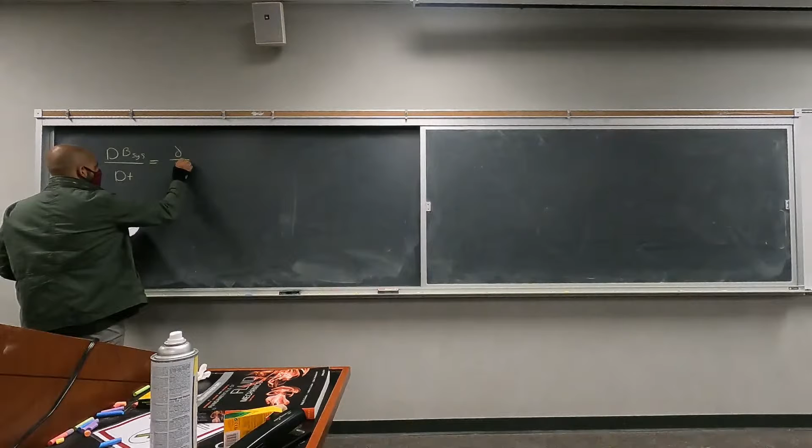Chapter 5, we started talking about it, if you recall, in the previous lecture. The idea was we are going to use the Reynolds transport theorem, which was one of the topics of Chapter 4, to derive the main equations for fluid flow. I'm just going to rewrite the Reynolds transport theorem just in case.

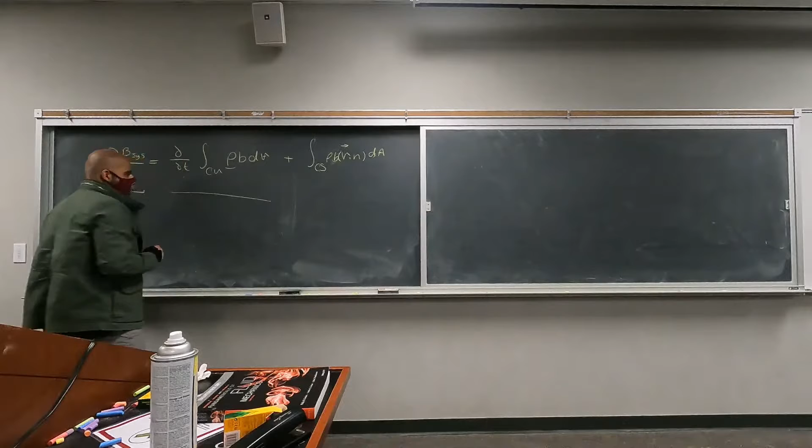Again, just to make sure we are all understanding what's going on here, the idea was changes of an extensive parameter B in a system over time is equal to changes of the intensive parameter, right? B equals M multiplied by a small b. The intensive parameter inside the control volume plus the fluxes over the surfaces.

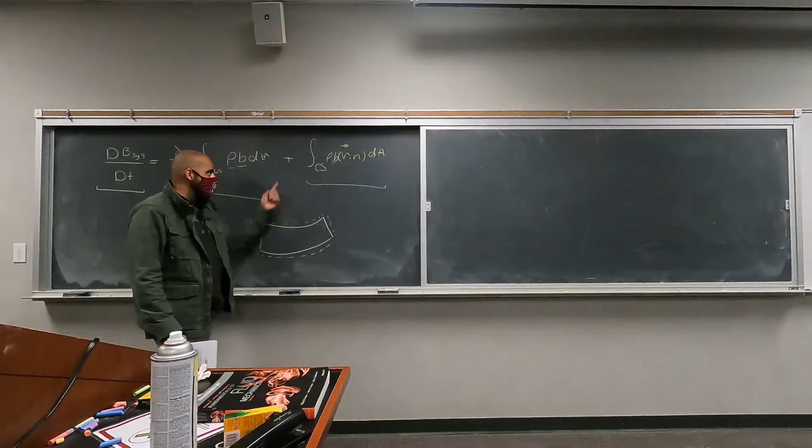To give you an example, let's say you have this type of control system passing through this control volume. Changes of variable b inside this control system are going to be equal to changes of intensive variable b inside this bigger control volume plus the fluxes on the boundaries, so whatever is going out or coming into the control volume. Okay, that was the idea of the Reynolds transport theorem. We're going to use this equation and find the main equations that govern the motion of the fluid, right?

The first thing we want to find is the conservation of mass. Since we are dealing with conservation of mass, your extensive property, capital B, is going to be equal to your mass, right? Which means your intensive property is going to be B divided by M, M divided by M. Your intensive property is going to be 1. We want to apply the Reynolds transport theorem to mass, using mass as the extensive property. So let's plug this in.

Changes of mass of a system with respect to time has to be equal to the changes over time of the integral over the control volume of rho multiplied by 1 multiplied by the elements of that volume, plus the integral over the control surface, these are the surfaces of the control volume, of rho multiplied by 1, which is your intensive property, multiplied by the... okay.

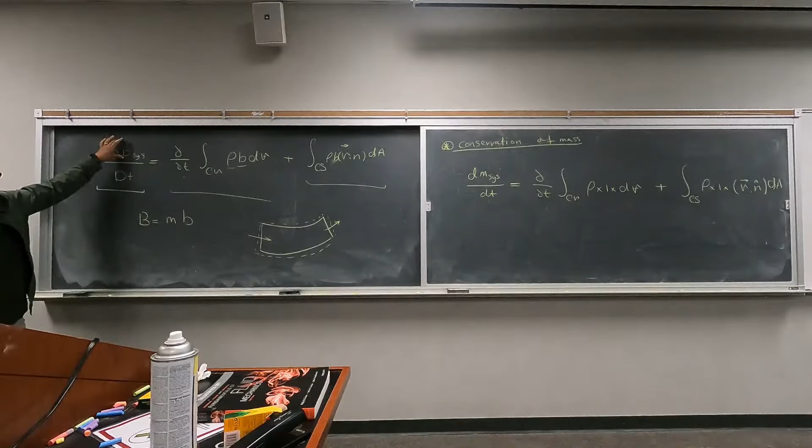Before moving on, I just want to make sure we are clear on all of the parameters that are used in this equation, right? Again, this B of system is a property, an extensive property of the system. t, of course, is time, and this is capital D, which stands for total derivative of that extensive property with respect to time. We have learned about total derivatives in chapter 4. I can see some examples in your homework as well, taking the total or substantial derivative.

This part, we are taking the derivative with respect to time over the control volume, right? So changes of that property inside that volume. And if this intensive property doesn't change inside your volume, so it remains constant all over this control volume, we can take this out, and you just want to make sure that we are understanding what this equation represents. Okay, let's take that out, just this part.

I'm assuming that this b doesn't change over the volume. So this essentially means that it is constant with respect to volume. We are going to treat it as a constant. You can take it out of the integral. We are going to treat it like a 2 or a 1 or whatever, right? Integral over the control volume of rho dV, right?

In most of our analysis, we assume density is also constant, right? Which essentially means that we are dealing with the integral of dV, right? And the integral of dV is your total volume, right? So if these things don't change with volume, this is what we are going to get: b rho V. What is rho V? It is m, right? m equals density multiplied by volume.

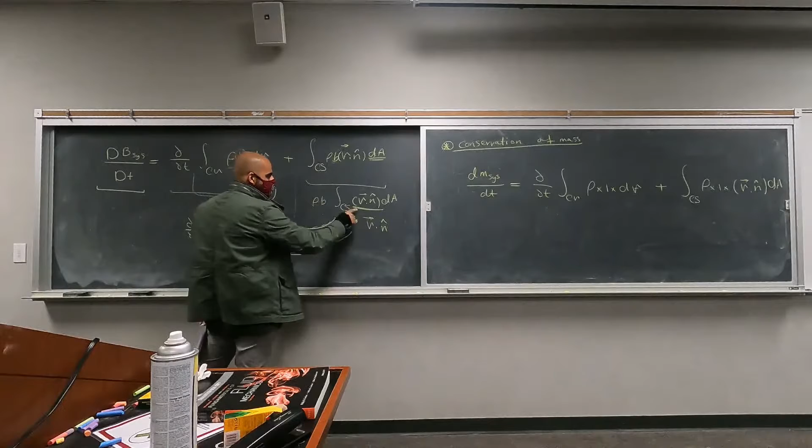When you multiply your V, your velocity vector, by a unit normal, what you're going to get is the velocity component that is normal to the surface. Okay? So this is the only part, the velocity component that is normal to whatever outgoing or ingoing surfaces, right? So the normal here changes direction. It has to be normal to that specific part of the surface. Does this make sense? So if your velocity is going out of the control volume in this direction, in this calculation, you only care about the normal component of it.

Again, if we assume that velocity is also constant and doesn't change, we can take it out. Okay. And then we are taking the integral of dA over the surface area. So we are dealing with rho b V A. Rho V A is m dot, right? Rho V A. This is something we have seen before, right? Okay. So we can replace it with m dot b.

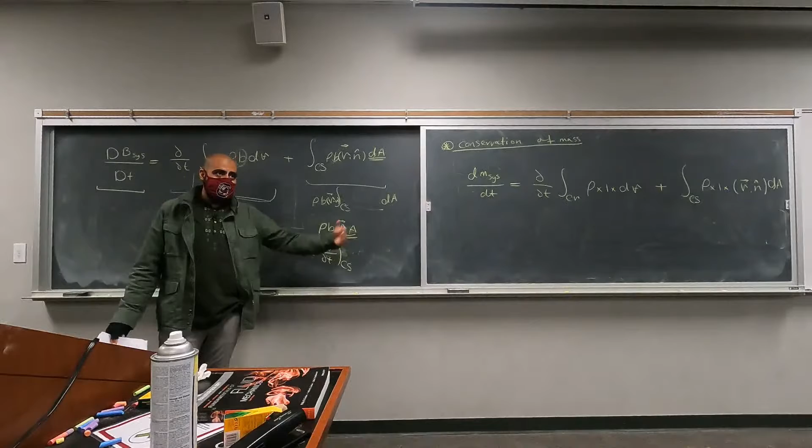Or how much of this extensive property goes out of the control surfaces. Okay. So changes of extensive property in a system are equal to changes of that extensive property inside the control volume, plus whatever of that extensive property is moving out of the control volume or coming into the control volume. Okay. To better visualize it, your book actually has this example, and we talked about this. Let's say this is your general system, right? Again, inside this control volume at time t equals 0.

Again, control volume at time t equals to t1. Your system has moved out of the control volume, right? So this will be whatever volume that has gone out. This will be this part of the system, right? And then the changes of this property inside the control volume is going to be this minus whatever has moved out of the control volume, right? Okay, does this make sense? Hopefully. Okay.

So just to make sure we can better understand what this Reynolds transport theorem stands for. We have used M as the extensive property, which means that for your intensive property, you're going to have 1, because intensive property was defined as the extensive divided by M. But what was the changes of mass of a system? We define a system as a volume or a selection in space that doesn't have any mass flow out or in, right? Which effectively means that mass of a system is constant.

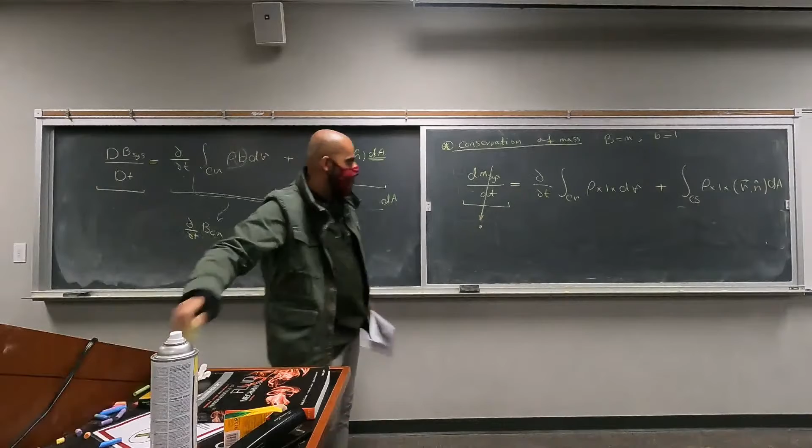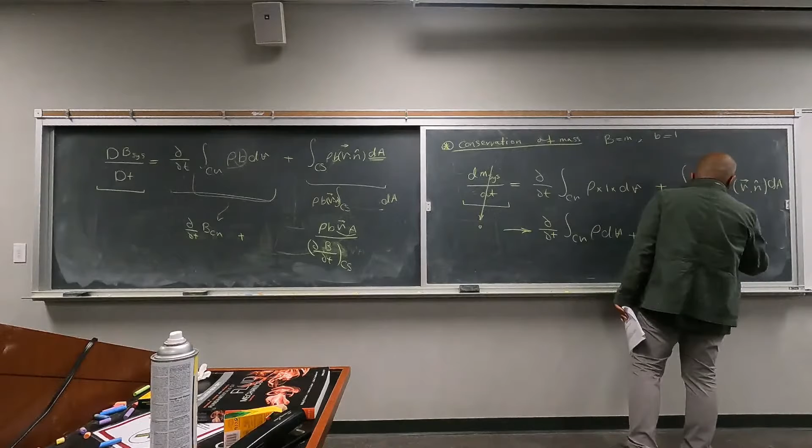So for a system, changes of mass over time is 0. That's based on the definition of the system, right? This is how we define the system. So this part is going to be 0 based on definition. Okay? Then our equation is going to become this: rho dV plus rho Vn dA is equal to 0.

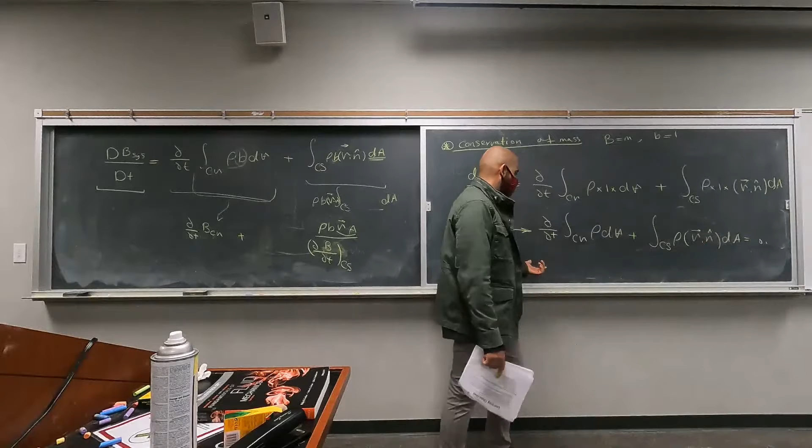What does this equation tell us? This tells us that the changes of mass inside a control volume is equal to the total mass in minus total mass out, right? If total mass in is equal to total mass out, then there is no change of mass inside the control volume. The mass is going to remain constant inside the control volume. If somehow you're creating mass inside the control volume, then m dot in is not going to be equal to m dot out. Okay? Any questions about the conservation of mass equation?

Again, we usually express the mass flow rate as your flow rate multiplied by your density, or flow rate is AV multiplied by rho. We usually say rho AV, but it is the same thing, right? That's for the case where your velocity is uniform in the outlet. So let's say you are dealing with a flow inside a pipe. Velocity is coming in with this distribution, which tells us the velocity does not change with respect to y. Velocity is always going to be equal to V infinity.

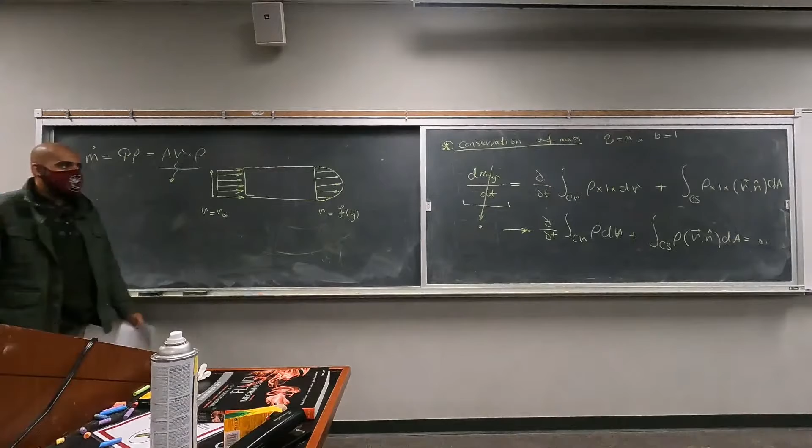In reality, your velocity is a function of y. So this is going to be the real distribution of the flow inside the pipe. It's going to go from 0 to a maximum value to 0, right? If the velocity is uniform, we can find the mass flow rate on a surface by multiplying density by the cross-sectional area of the pipe and the velocity. But in our equation here, we are not making any assumptions about the velocity. So the mass flow rate of a surface is going to be the integral over the control surface of rho Vn dA.

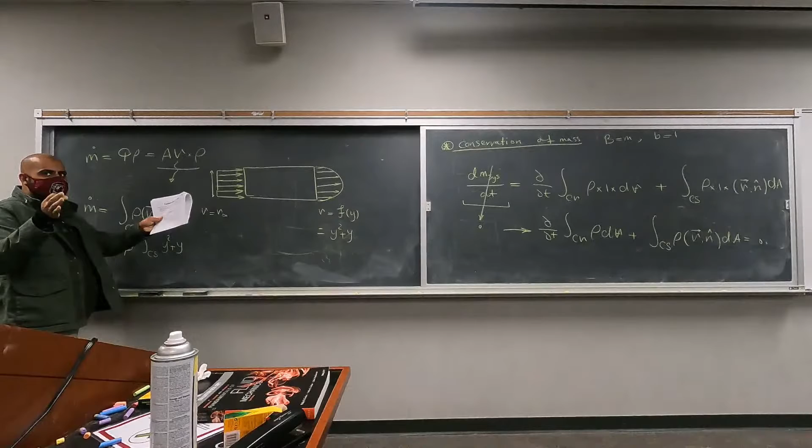If your velocity is distributed like this, you have to take this integral, which is not that hard. It looks very frightening, I get it, but we usually assume rho is constant, so we take it out of the integral. And as long as you know the distribution of velocity, let's say y squared plus y, and you are dealing with a two-dimensional case, meaning the depth of this pipe is a unit value, 1 meter, your dA is going to be dy multiplied by 1. So this is the integral you take from 0 to whatever maximum y is.

When you solve an example, it's going to become a little more clear, but let's just keep the integral as is at this point. Okay. What if we want to find the average velocity? Let's say your velocity distribution is non-uniform. How can we find the average velocity? That's actually by setting these two equal. By average velocity, we are assuming that a uniformly distributed velocity can replace your non-uniform distribution. That's the idea. Let's call that V bar.

So the assumption here is that rho A V bar has to be equal to the solution to this integral. Which means that your V bar is going to be the integral divided by rho A. So in a non-uniform velocity field like this, if you were to find the average velocity, this is the equation you want to use.

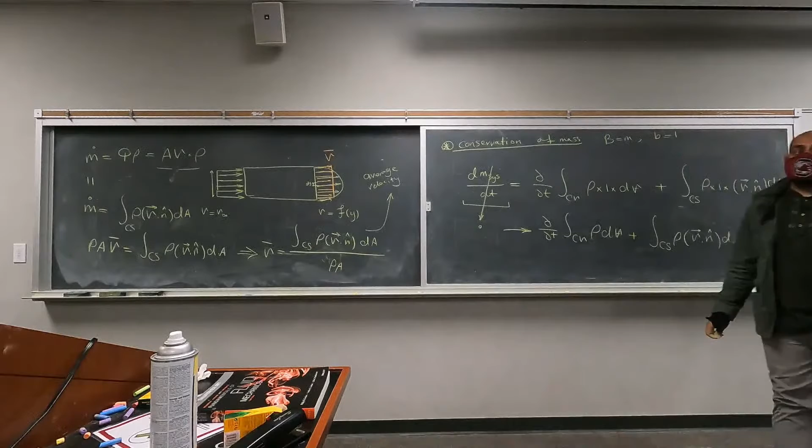Are there any questions? No.

Okay. So let's solve the first example. That's example 5.1 on the printout, the handouts you received. If you are watching this online, you can go download the handouts from the Blackboard website in the contents tab in the chapter 5 folder.

Okay, so example 5.1 is telling us a great danger to workers in confined spaces involves the consumption of breathable air. Before reading this, one thing I'm probably going to do for your next exam is to remove all of these explanations, the unnecessary explanation that may become a source of confusion. So I'll probably give you a straight question, right? But we have it in the example, so we have to read through it.

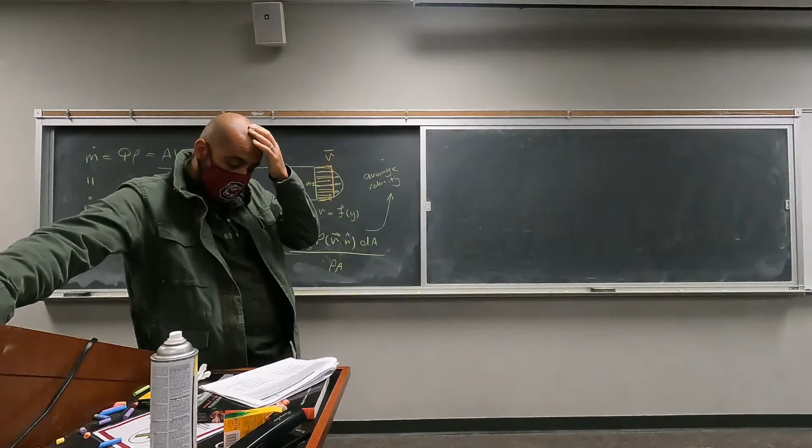So a great danger to workers in confined spaces involves the consumption of breathable air and its replacement with other gases such as carbon dioxide. To prevent this from happening, confined spaces need to be ventilated. Although there is no standard for air exchange rates, a complete change of the air every 3 minutes has been accepted by the industry as providing effective ventilation. So one piece of information: complete change of air every 3 minutes. Okay.

A worker is performing maintenance in a small rectangular tank with a height of 10 feet and a square base 6 feet by 6 feet. So we have a tank. 10 feet, 6 feet, 6 feet.

And fresh air enters through an 8-inch diameter hose and exits through a 4-inch diameter port on the tank wall. So we have a hose, an 8-inch diameter. It doesn't really matter where they are, but we are going to assume that they are on the side walls. Okay. The flow is assumed steady and incompressible. Steady, incompressible.

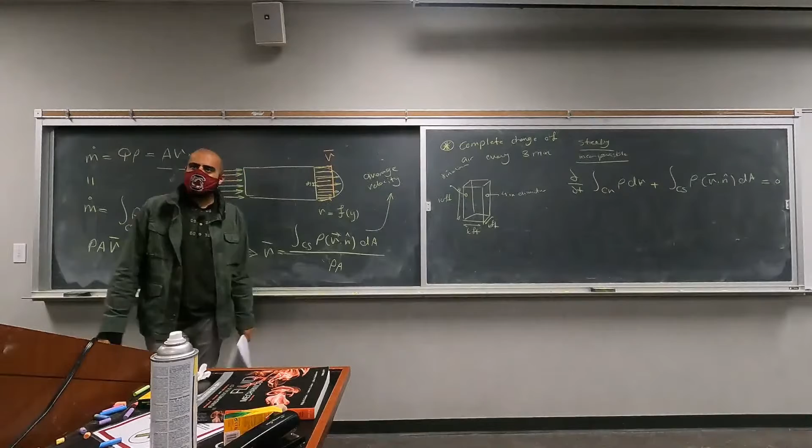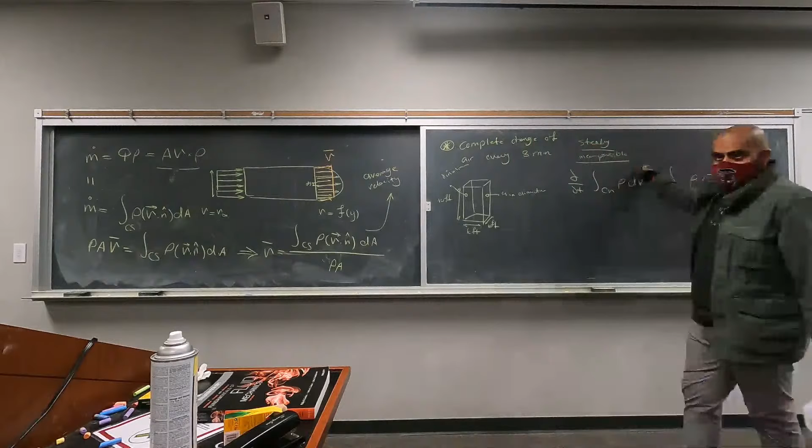The first thing is we are told that this is a steady problem, right? A steady state problem. What does this mean? Constant with time. So this part goes to 0, right? The changes with respect to time in the equation will go to 0. That's it. So your equation will simplify to the integral over the control surface of rho Vn dA equals 0.

But we are also told that the flow is incompressible, which means that density does not change with time or is constant, right? So we can take density out of this equation as well. Eventually, this is what we are going to get. Equals to 0.

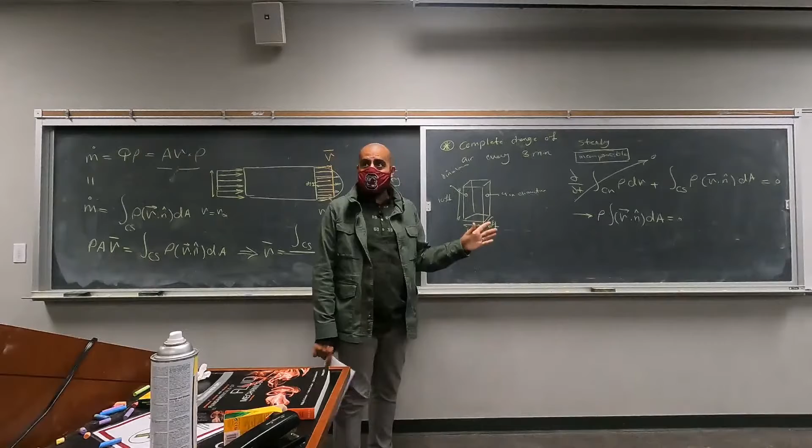We can actually make one more assumption that is hidden in this question. Since these holes are much smaller than the tank, we can assume the velocity coming in and going out through these holes is distributed uniformly, because the hole dimension is much, much smaller than the tank, right? So we can take this out of the integral as well.

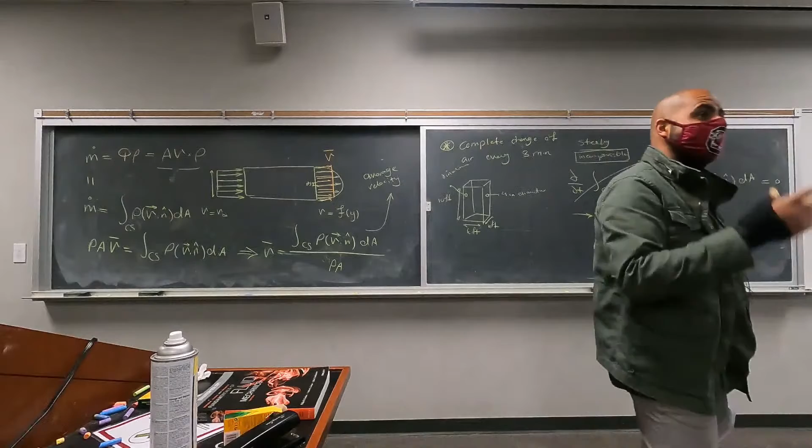And the other assumption we are going to make, which is not just an assumption, it's actually a true statement, is that the velocity is going to be normal to the surface, right? Yes. What do you mean by that? They have different velocities, right? They are not the same velocity. They are just distributed uniformly individually.

So let's say this is the side view of your hole. For one of the holes, velocity is distributed uniformly. And this is the smaller one. Again, a different velocity, but distributed uniformly. Or you didn't need to make the assumption. You could have just said that I'm calculating the average velocity. That would have worked as well because the holes are so small.

Okay, and the idea was the velocity is also normal. So V dot n gives V times the integral of dA over the control surface. That's a double integral of dA, which means that we are dealing with A. Rho VA in minus rho VA out is going to be 0. We have two control surfaces here, one coming in, the other one going out, so we have two integrals. At the end of the day, this simply means that m dot in equals m dot out.

Okay. So this is the equation we need for this problem. We didn't need to derive the equation from this huge integral equation. We could have probably guessed this is the situation. M dot in is equal to M dot out, right? This is something you have seen before. But I just wanted to make sure that we can simplify the equation.

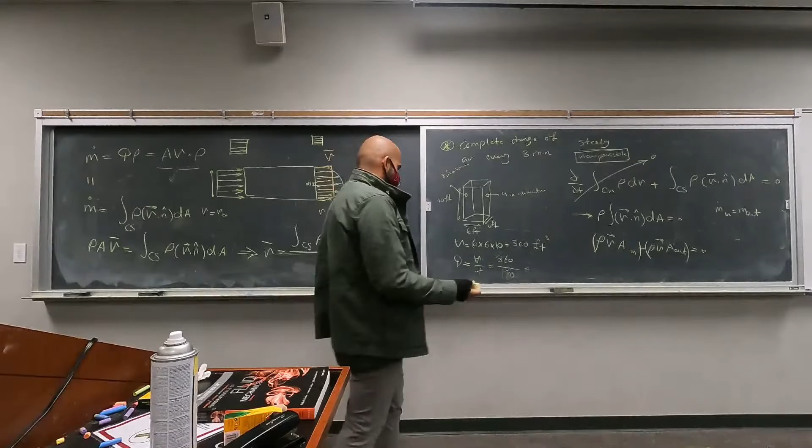So your book has done it in cubic feet per minute, but I'm going to do it per second. It doesn't really matter. So we're going to get 2 cubic feet per second. Okay, is this clear?

Part B. Part B is asking us to find the velocity of the air entering and exiting the tank at this exchange rate. So we are told this is incompressible, right? So from this equation, these two parts will cancel out. And AV in is equal to AV out, right? And all of this is equal to Q, right? That we have already calculated in part A, 2 cubic feet per second.

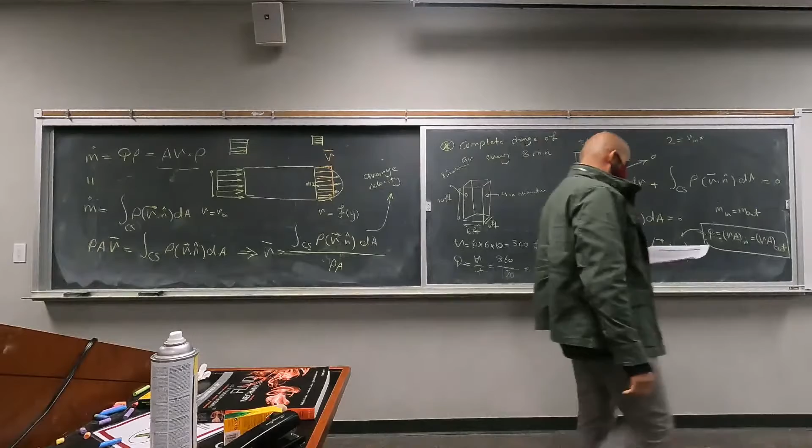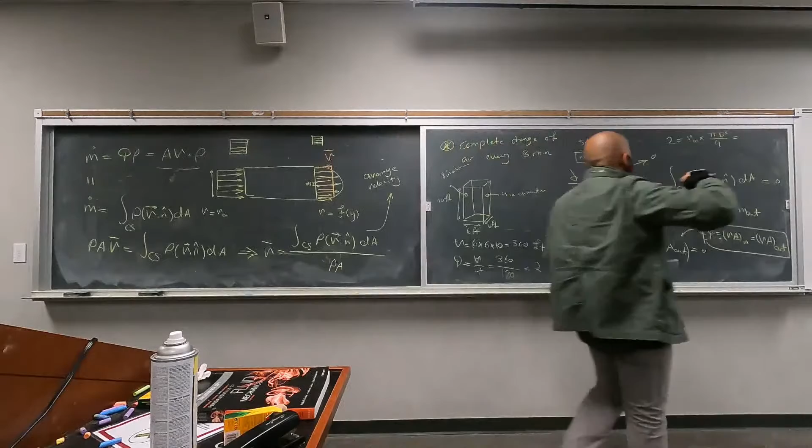So let's say 2 is equal to, let's take the in part first, V in multiplied by the area in. That's an 8-inch diameter. Pi d squared divided by 4. You just have to make sure that you are converting inches to feet or the other way around. How many inches are in a foot? 12, yeah? 12. So this is V in multiplied by pi, 8 divided by 12, squared, divided by 4.

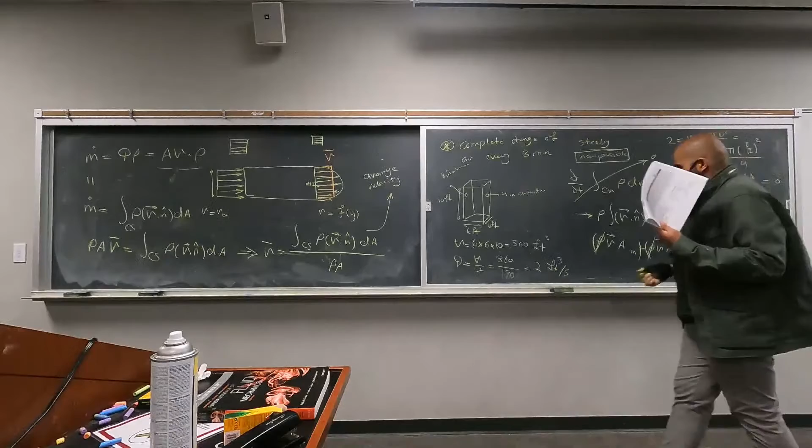Can someone calculate this for me if you have a calculator? Actually we can calculate it, that's easy. V in, pi, 64 divided by 144 divided by 4. That's 16. That's equal to 2. And that's 8. So your V in is going to be 144 divided by 8 pi. That's in feet per second.

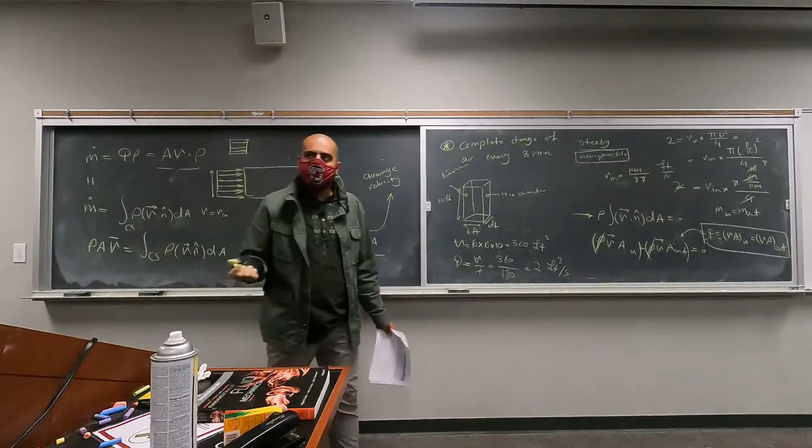And then you do the same operation for V out. The only difference is going to be the area, right? Area is the only thing that is different. Is this clear? Okay. So let's move on to the next example.

Next example, that's example 5.2. It tells us air flows steadily between two sections in a long straight portion of a 4-inch inside diameter pipe as indicated in the figure. Let me just draw the figure on the board and we'll go from there. Okay, so we have a control volume inside the pipe, 4-inch diameter pipe, right?

The diameter of the pipe does not change. It is going to be equal to 4 inches, and the uniformly distributed temperature and pressure at each section are given. We have the pressure, 100 psia, and temperature is 540 degrees Rankine. P2, we are also given the pressure, 18.4 psia. T2 is 453 Rankine, and V2 is 1,000 feet per second.

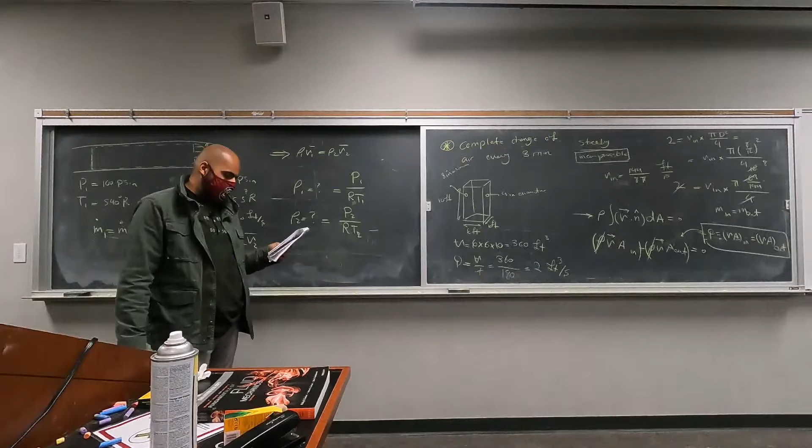right? Okay. Well, how can we find the density at each cross section? Ideal gas law, that's it. What is ideal gas law? It is rho1 equal to P1 divided by RT1, and rho2 equal to P2 divided by RT2. We are given the pressure and temperature, and we only need to have R, which is usually given to us. But we don't need to have R here. And I'm going to tell you why.

So let's say we have these two equations, the ideal gas law for density, and we have this. We are trying to find the average velocity at point 1. So let's rearrange this equation. V1 is going to be equal to rho2 divided by rho1 times V2, right? That's the idea. We are going to use these ideal gas law equations here. So rho 2 is P2 over RT2, divided by P1 over RT1, times average velocity at point 2.

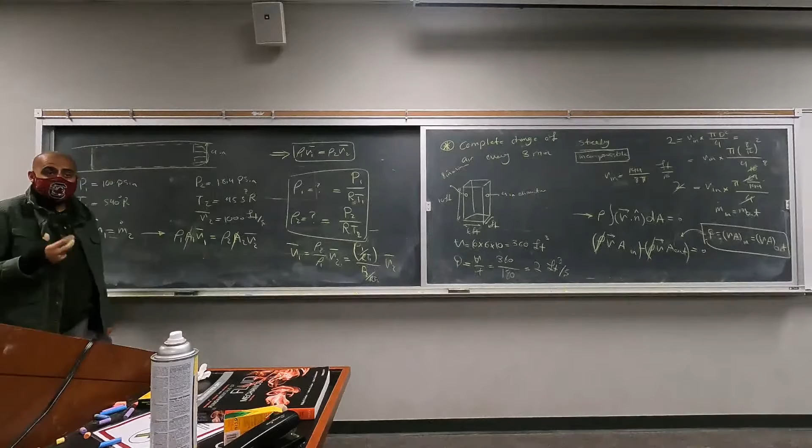Here R's are equal, they will cancel each other out. So you don't need to have the R here. You can just cancel it out. If you were told to calculate the density first, so if you needed a value for density, you needed to have R, but here we don't need a value for density. So you plug in pressure and temperature, and pressure and temperature and velocity again. You just have to make sure you are consistent in units, right?

We are given pressure in PSIA. What is PSIA? Is it in inches or feet? Inches, right? But we are given the velocity in feet per second. So you just have to make sure you are consistent when it comes to units. But then again, since we are taking the ratio here, the units will cancel each other out. So you can just plug it in, and it will give you the same result, right? So are we clear on how the units are going to be consistent? Do we need to convert them here, or no? No? Yes? OK. So I'm going to take it as a yes.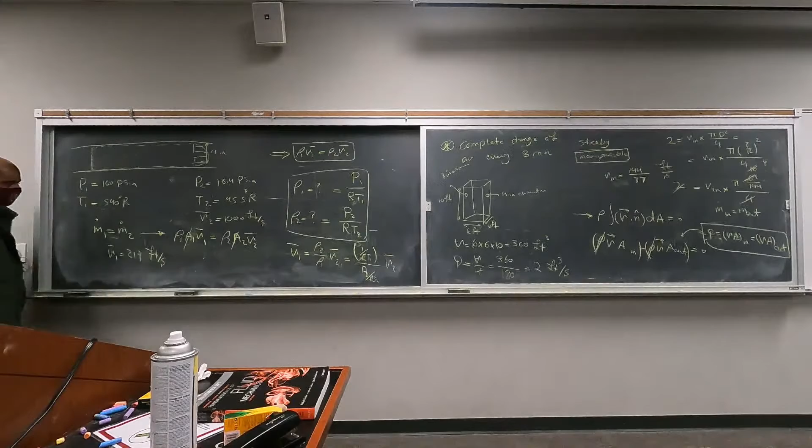And then you plug in the numbers. Your V1 is going to be 219. That's the average velocity at 1. 219 feet per second. OK.

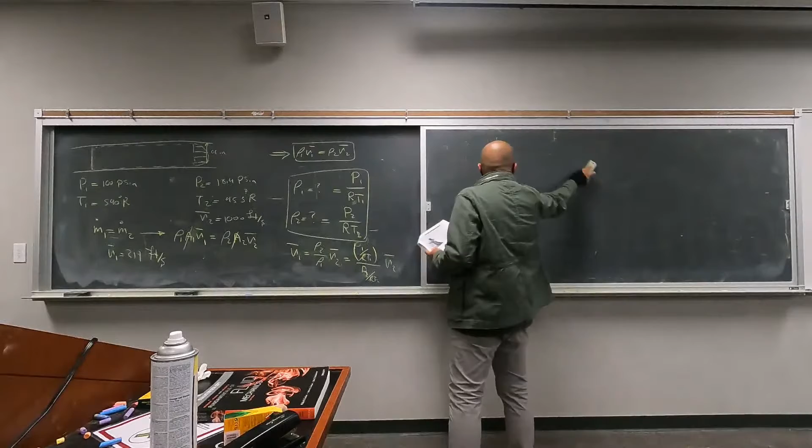Next example. Example 5.3. The inner workings of a dehumidifier are shown in this figure. Moist air, which is a mixture of dry air and water vapor, enters the dehumidifier at the rate of 600 pound mass per hour. Let me. So the moist air comes in to the dehumidifier at the rate of 600. I'm going to say m dot of moist air, 600

pound mass per hour. Okay, liquid water drains out of the dehumidifier at the rate of 3 pounds mass per hour. So m dot of liquid water, 3 pounds mass per hour. We have a simplified sketch of the whole process that is given to you. We have m dot 1, which is your 600 pounds mass per hour. We have liquid water drainage, and this is your liquid water, which we're going to call m dot 3.

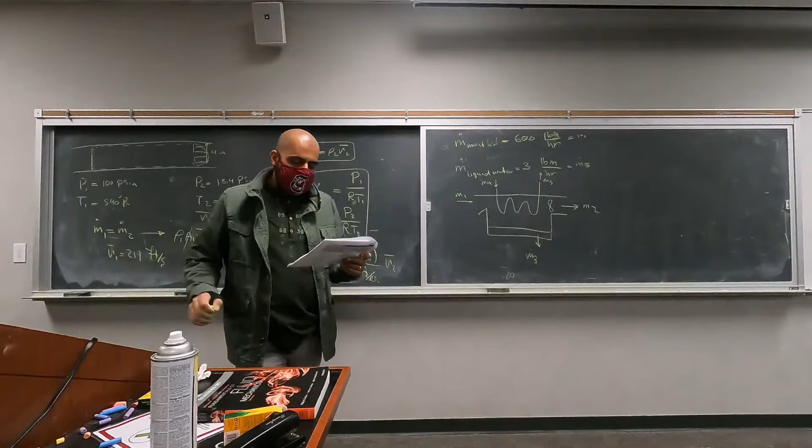So this is m dot 1, m dot 2, m dot 3. I'm sorry, m dot 3. M dot 2 is the air going out. There is also a fan here. Okay. And we have a cooling coil, m dot 4, m dot 5. Okay, we want to determine the mass flow rate of the dry air and the water vapor leaving the dehumidifier. How should we determine that?

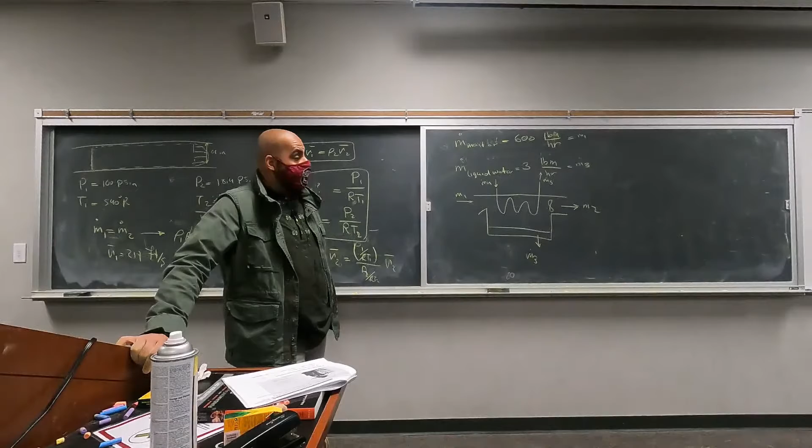So we have m dot 1 coming in, which is the moist air. We have liquid water going out, and m2 is a combination of dry air and some water vapor, right? M4 and m5 are the coolant, a mass in and mass out. How can we calculate m2? M2 is the parameter of interest here. Think about it.

This may look like a very complex problem, but in fact, it's one of the easiest problems you can deal with. Okay. And the idea is mass is conserved, right? So whatever is coming in has to go out. What is coming in here? We have m.1 coming in and m.4, right? What is going out? m.5, m.2, and m.3, right? So the summation of the in parts has to be equal to the summation of the out parts, right?

But, and that's a huge but, the coolant here does not mix with the moist air and water. So the coolant part does not come into the analysis of air, right? The coolant is a separate control volume. So those are just trick values. You don't need to use them, right? Because it's just the coolant. It does not mix with your air. So there is no mass transfer between the coolant and the air and water, okay? So it becomes even simpler.

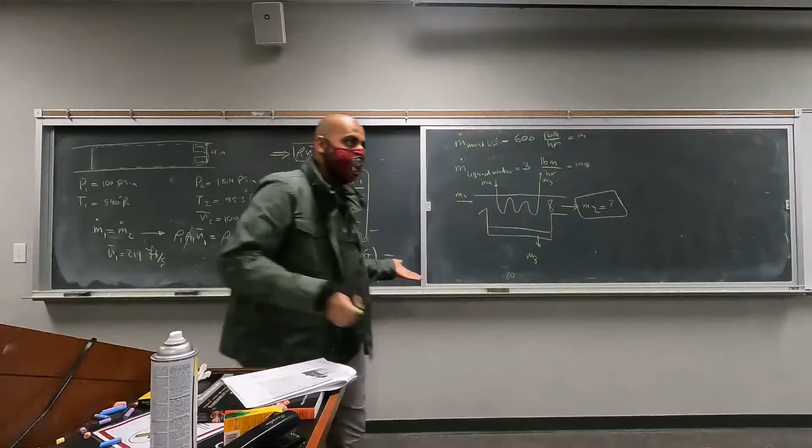m.1, the mass in, is equal to mass out, which is m.2 plus m.3, right? m.1 is given to us as 600 pounds mass per hour. m.3 is 3 pounds mass per hour, which means that m.2 is going to be 597 pounds mass per hour. Okay.

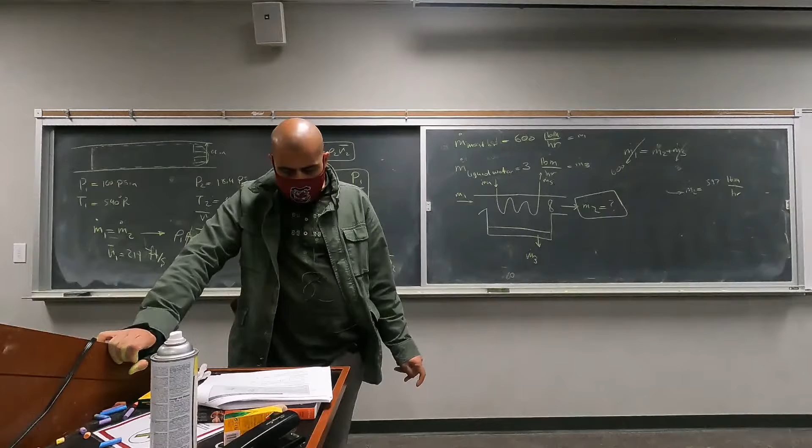Next example. This next example is actually a little more complicated because it involves actually taking the integral. So just don't freak out when you see something like this. Try to simplify the problem as much as you can, and I'm pretty sure you can figure it out. We are given an incompressible laminar water flow that develops in a straight pipe having radius R as indicated in the figure.

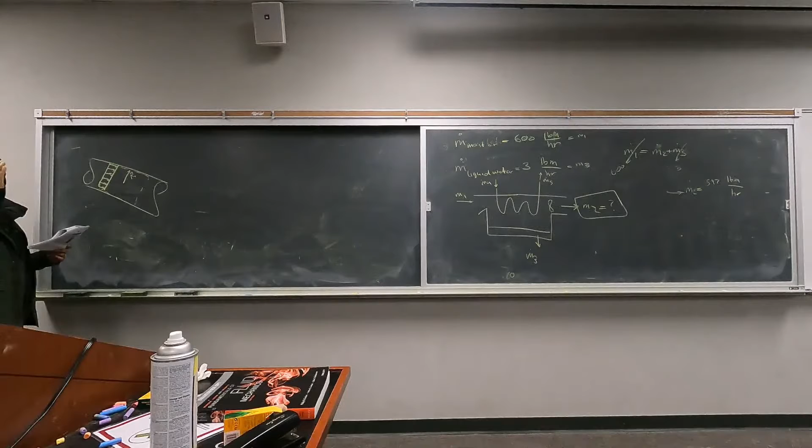And this is the figure. Okay. We have this water pipe, the control volume inside it. And the radius of the pipe is capital R. The velocity profile is uniform at section 1. What does a uniform velocity profile mean? This means that it is not a function of r or y or anything, just a constant value at any point of that cross-section 1. Okay? That's a uniform velocity profile. And parallel to the pipe axis everywhere.

At section 2, the velocity profile is axisymmetric and parabolic. Let me actually use a different color, or we can just remove these parts of the pipe. So parabolic and axisymmetric. Okay. And with zero velocity at the pipe wall, so velocity 0 here, and the maximum velocity, it's called Umax, at the center line. Okay.

We are also given the formula for distribution of velocity. Velocity at point 2 is equal to your maximum velocity times 1 minus (r divided by R) squared. Small r here is the distance from the center line, so small r changes from 0 to R. Okay. We want to find the relationship between this uniform velocity, capital U, and the maximum velocity. That's part A. Part B, we're going to talk about later.

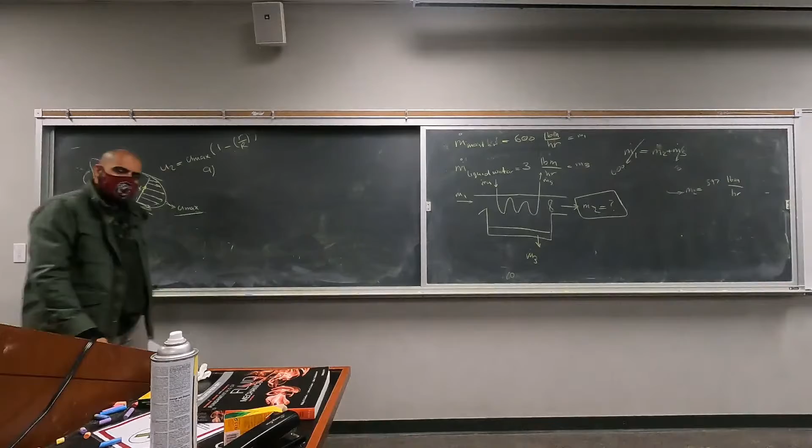So do we understand what the problem is? We have flow inside the pipe, right? Flow comes in with a uniform distribution at one side and is going out with a non-uniform distribution on another side, and we have the equation of that non-uniform distribution. We are asked to find the relationship between this uniform velocity and the maximum velocity. How can we find that? Do we have any guesses? So would Umax be equal to U for this case? No. I'm just trying to think, last time we had parabolic, that was the average velocity.

Well, what is the main overarching equation that applies here? Some mass is coming in, some mass is going out. It should be density times area times velocity. That has to be constant, right? Your m dot has to be constant. Or conservation of mass. That's the equation we have been talking about. So we are going to use conservation of mass to find out the relationship between the two.

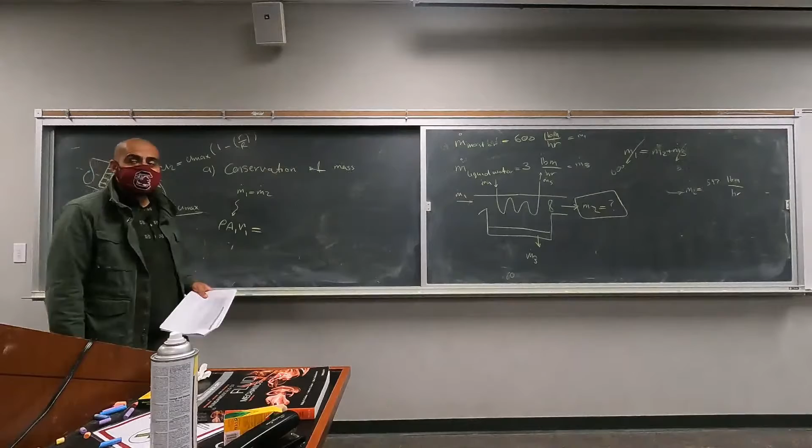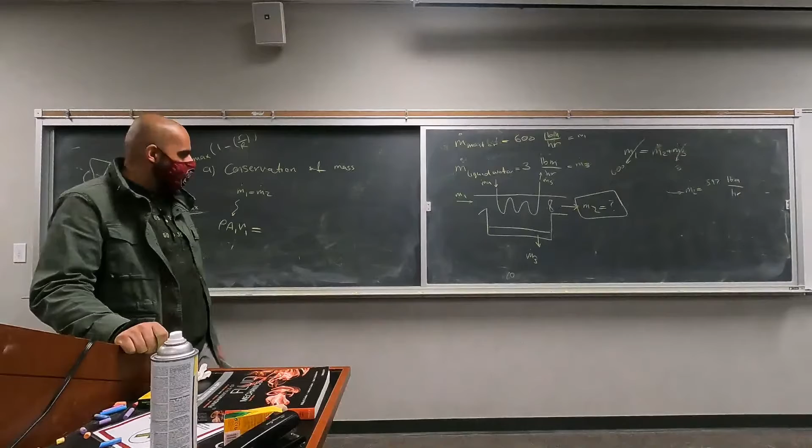We have to take, pardon me? Yeah, I was asking. Yeah, go ahead. Replace what with U max? This equation? Okay.

That is, you are moving in the correct direction, right? But the problem here is the velocity is not uniform, right? So if you recall, in the main conservation of mass equation, we had partial t of the control volume integral of rho dV, plus the control surface integral of rho V dA, right? This part is 0 under steady state conditions. So which essentially means that whatever is coming in is going out, right? For the part coming in, this velocity does not change with A, so we can take it out of the integral. So eventually it will become rho A1 V1.

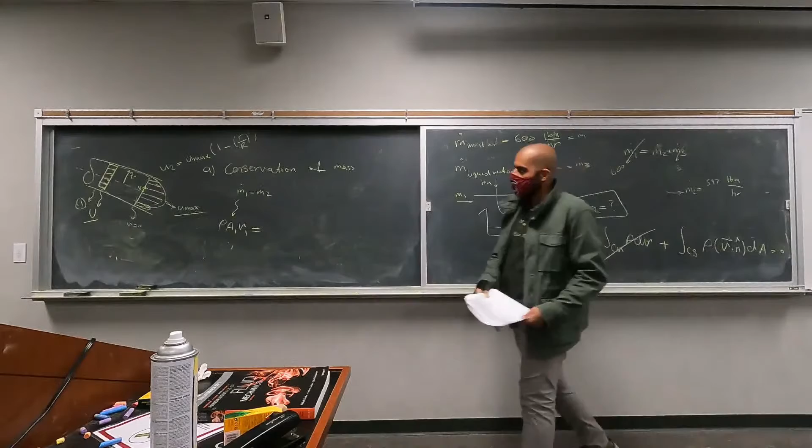But for the outgoing part, this velocity changes with location, so it changes with r or A for that matter, so we cannot take it out of the integral. But we have the distribution with respect to r. And we already know that the velocity is always normal to this surface area. This is the surface area we are looking at. The cross-section velocity is always normal. So this part of the equation is going to be the integral over the control surface. Rho is constant, incompressible, so we can take it out. V dA. And we also have the distribution of V, or U2, the same thing. So let's plug that in.

U max times 1 minus r squared over R squared, dA. Can we take this integral as is? In the problem, it states dA2 is equal to the circumference times dr. So we can replace dA with that: 2 pi r dr, right? Yeah, like dA2 equals 2 pi r times dr. Exactly. That's what I wanted to get at.

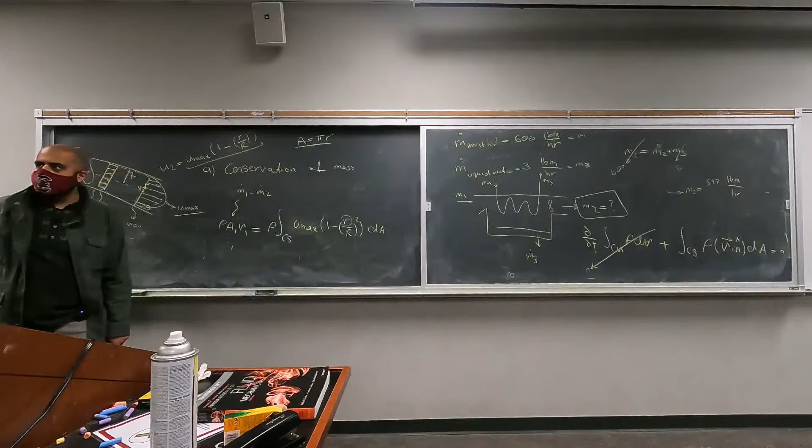Here, our variable is small r, which changes from 0 to R. But here we have dA. We cannot take the integral of a variable with respect to something else, unless we know the relationship between the two. But dA here is a small element of area on the surface. Area of a circle is pi r squared. dA is the derivative of this, which is going to be 2 pi r dr. Does this make sense? And this was actually given to you in the text of the problem as well. So 2 pi r dr.

At this point, we should be able to take this integral because U max is constant; the maximum value of velocity doesn't change. Capital R is the radius of the pipe; that doesn't change either. 2 pi is also a constant. The only variable is r, which we integrate with respect to itself. So let me take the constants out: rho U max 2 pi, integral of 1 minus r squared divided by R squared, multiplied by r, dr. And small r changes from 0 to capital R, the radius of the pipe.

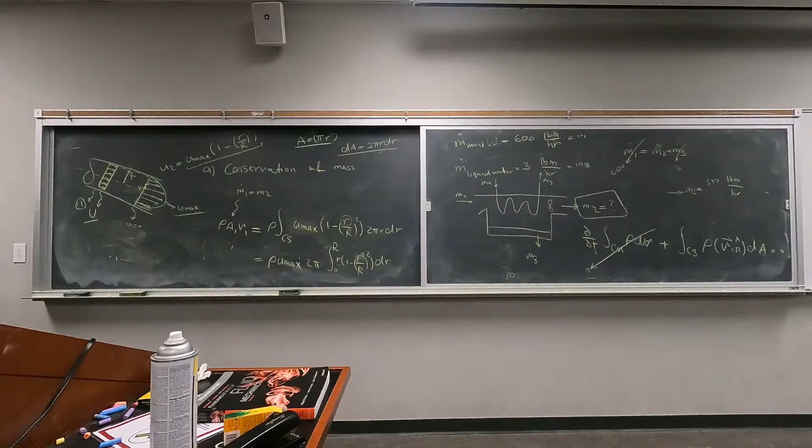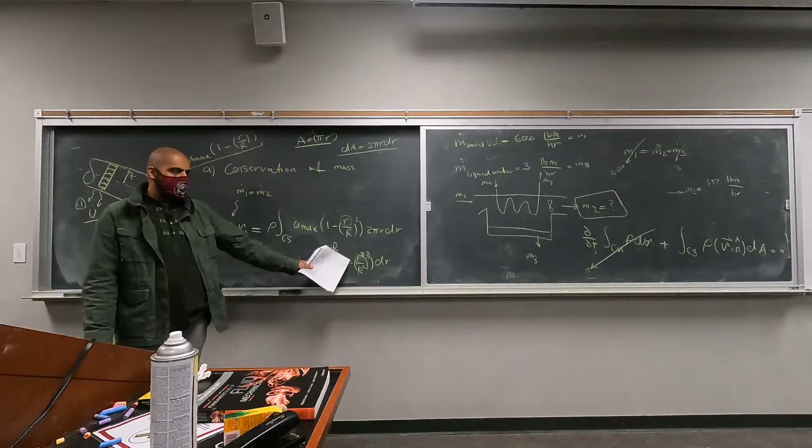Okay. Let's multiply whatever is inside this parenthesis by this r. So we get r minus r cubed over R squared. The integral of r dr is r squared divided by 2. The integral of r cubed over R squared, where R squared is a constant, is going to be r to the 4 divided by 4R squared. Is this clear? Okay.

So the solution to this integral is going to be 2 pi rho U max times r squared over 2 minus r to the 4 over 4R squared, from 0 to R. If you use 0, you get 0. But if you put in R, you get R squared over 2 minus R to the 4 over 4R squared, minus 0. So this part will be the solution to your integral. R squared and R to the 4, this will cancel out.

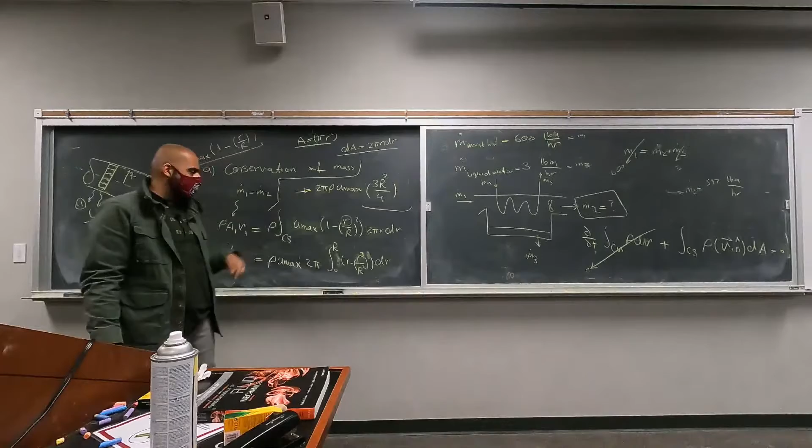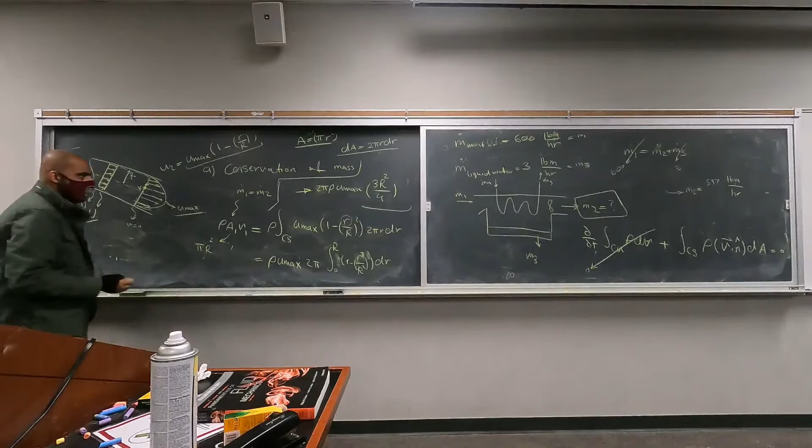So we're going to get r squared over 4. And this is essentially 4r squared divided by 4 minus, I assume you know how to do this simplification here, so I'm just going to replace it with the final answer. Are we clear on what happened here? Taking the integral, all of this. The other side is rho A1. A1 here is pi r squared, right? So I'm going to continue on the other side of the board.

And we can actually cancel out the rhos because rho doesn't change. So I'm just going to write this simplified version, pi r squared. What is V1? V1 is U, capital U, equals 2 pi, we have already canceled the rho out, U max, 3r squared divided by 4, right? R squared will cancel out. Pi will cancel out. 2 here will go with 4. We're going to get 2. So U max is going to be 2 by 3 U.

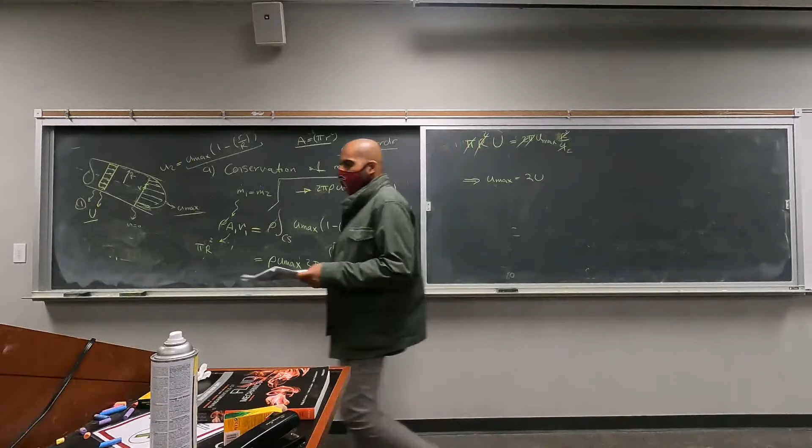Or there shouldn't be any 3's here. I made a mistake somewhere. But eventually, this is what you're going to get: U max is equal to 2U. Let me see where I made the mistake. This solution to the integral is r squared divided by 4. That's where I was wrong. Okay. So we have the relationship between U max and U. Capital U is the uniform velocity at section 1, and U max is the maximum velocity on cross section 2.

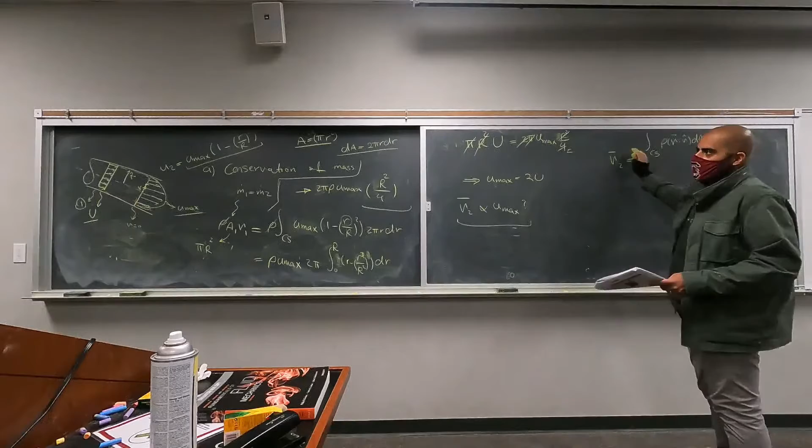Next part of the problem is asking us how the average velocity at section 2 is related to U max. So we need to calculate the average velocity at section 2 here. What was the equation for average velocity at section 2? It was the integral of rho Vn dA over section 2, which we have already calculated. This is the value of that integral, divided by rho A2, right?

So plug that in. You're going to get 2 pi rho U max r squared divided by 4, and here you're going to get rho pi r squared, right? Cancel out, which means that U max is equal to 2 multiplied by the average velocity. The conclusion you can make from this is that your uniform velocity is actually equal to the average velocity at section 2.

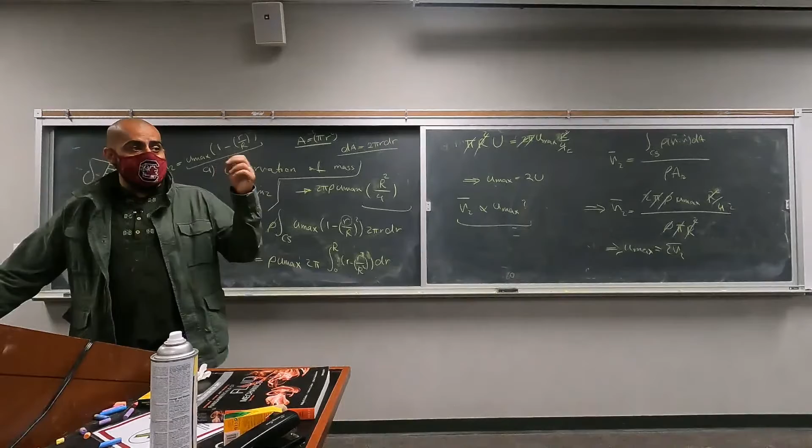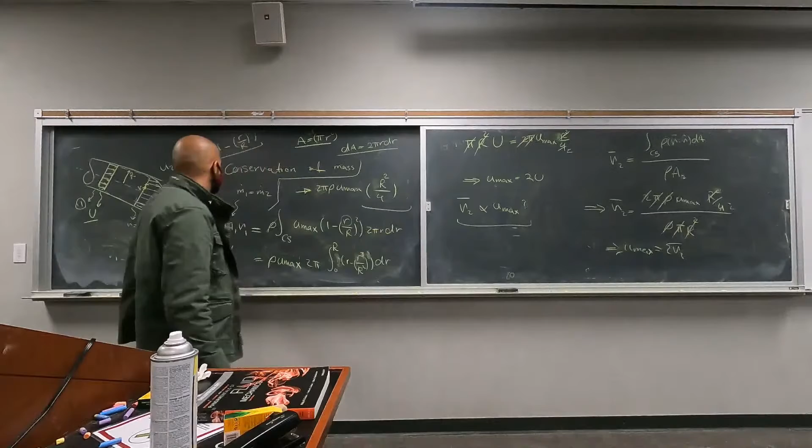And the conclusion you can make from this is that an average velocity is a good substitution for a non-uniform velocity distribution, right? Because the average velocity is equal to the velocity here. This essentially means that your mass is conserved: rho AU is equal to rho A V average 2, right? So we can substitute a non-uniform velocity distribution with its own average velocity in our calculation. Does this make sense? Okay.

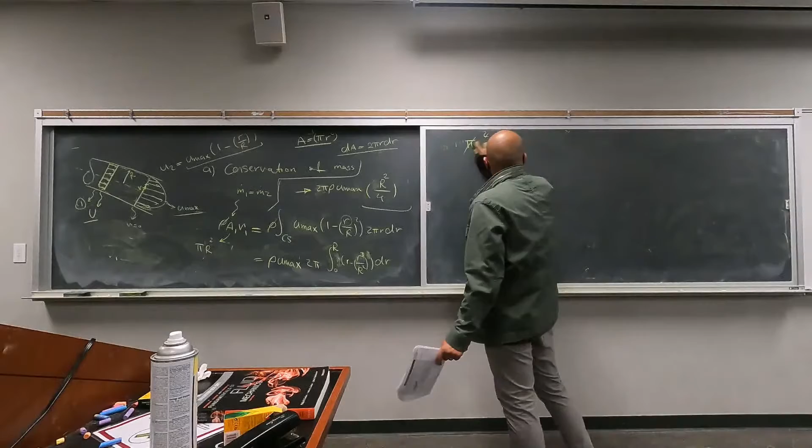Let's move on to moving frames. There's another example on this topic that I want to give you as a quiz, but you can actually do it later. Let's move on to a moving frame or a moving control volume. We talked a little bit about the moving control volume in the previous lecture, I think a week ago on Tuesday.

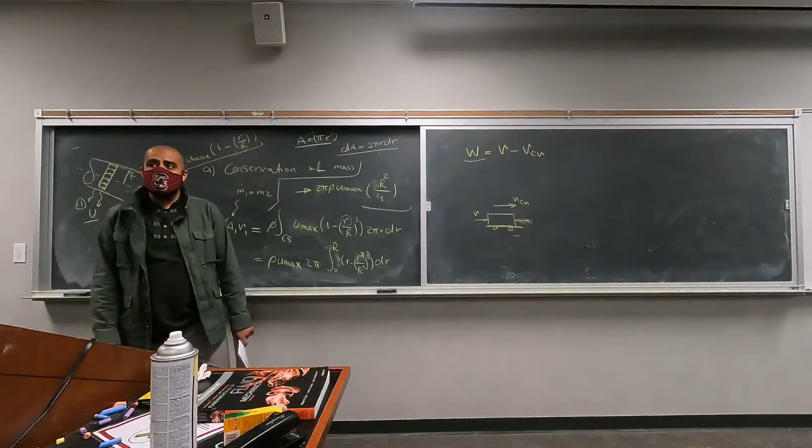And the idea was the fluid velocity is going to be equal to the velocity of the fluid relative to a non-moving frame minus the velocity of your control volume. So if your control volume is moving at a speed Vcv, and you have fluid coming in and going out at velocity V, the relative fluid speed is going to be V minus the velocity of the control volume. You have to subtract the velocities. And in the equation for conservation of mass, for velocity, you have to use W, which essentially changes the Reynolds transport theorem as well. This was the main equation for the Reynolds transport theorem, right?

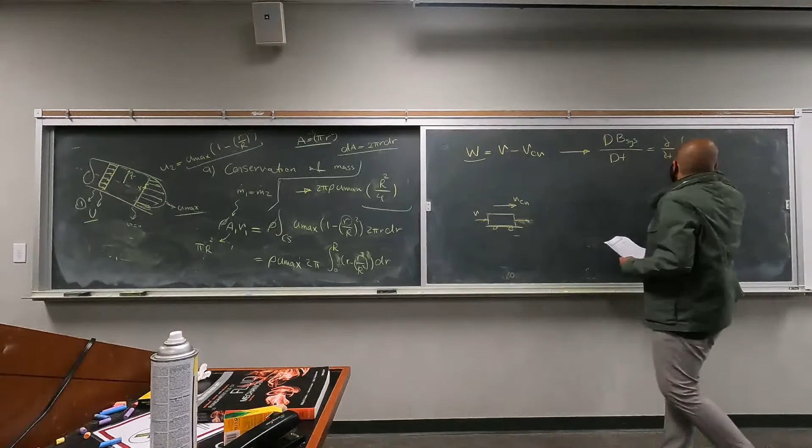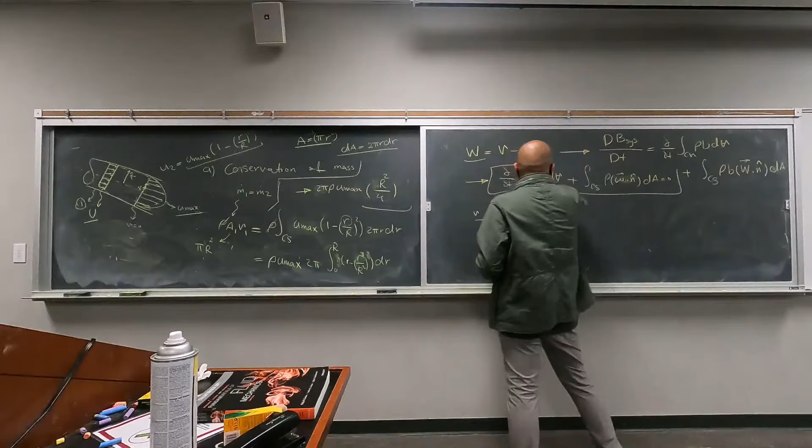Here, instead of V, we are going to get W. That's the only difference. So you just have to subtract the control volume velocity from the velocity you are given to get to the solution. This means that your conservation of mass equation is going to be partial over partial t of the integral over the control volume of rho dV, plus the integral over the control surface of rho W dA, equals 0. So this will be the equation for a non-deforming moving control volume.

So all of the control volume is moving at the same speed, right? It is a non-deforming control volume. Because if it was a deforming control volume, then it would have been very, very much more complicated. So let's solve another example with the moving frame, moving control volume. This is example 5.6. So we are jumping one example.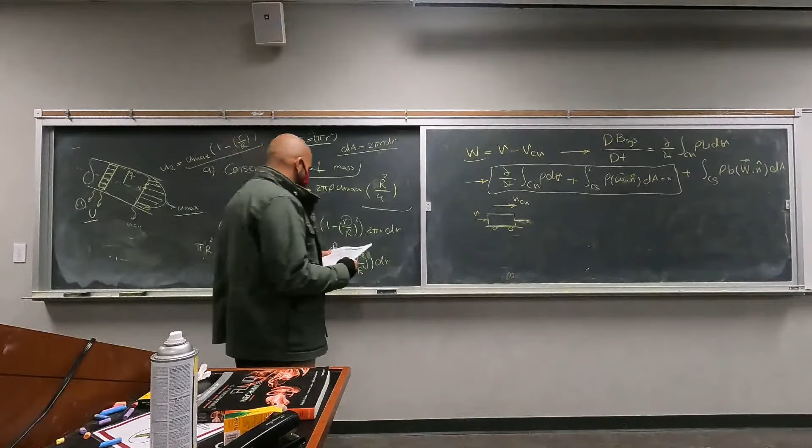An airplane moves forward at a speed of 971 kilometers per hour. Okay. So the velocity of the plane is 971 kilometers per hour. As shown in the figure, the frontal intake area of the jet engine is 0.8 meters squared. Let's say this is your jet engine. Very bad depiction, but A1 is 0.8 meters squared. And the entering air density is 0.736 kilograms per cubic meter.

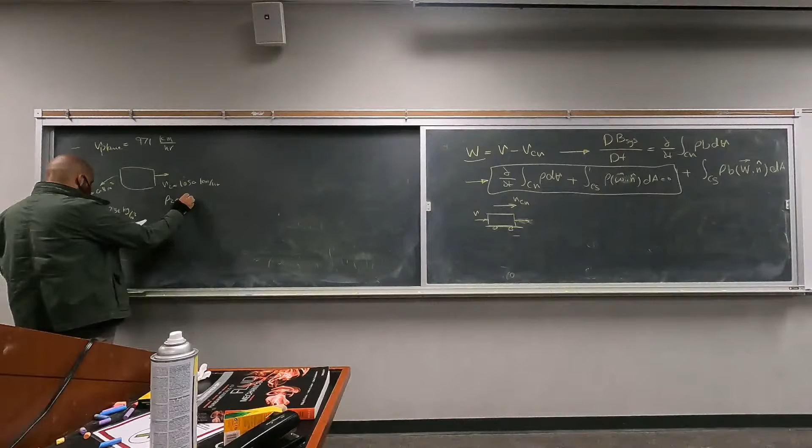A stationary observer determines that relative to the Earth, the jet engine exhaust gases move away from the engine with a speed of 1,050 kilometers per hour. So V2 here is 1,050 kilometers per hour. That's the exhaust gas. And the exhaust gas density, rho 2, is 0.515 kilograms per cubic meter. Also, we are given the exhaust area, 0.558 meters squared. We also have the mass flow rate of the fuel. Let's call this m dot f. You're adding fuel to the jet, of course. We want to estimate the mass flow rate of fuel into the engine in kilograms per hour.

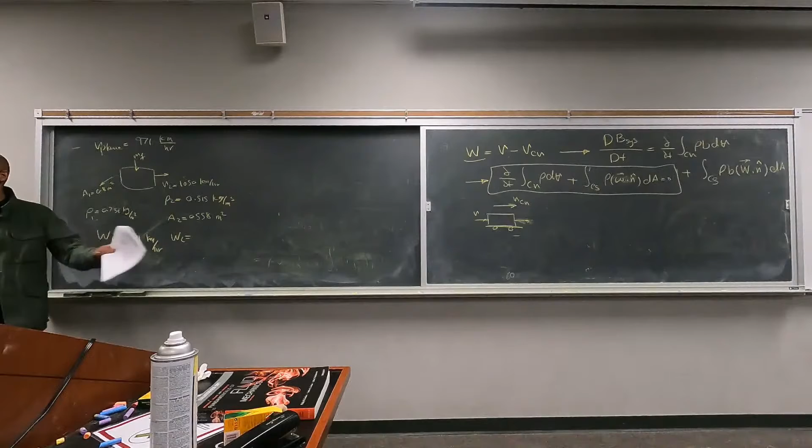Okay, let's see. What else do we have? So we need to find the W's for each of these things. That's the first thing you want to do. What is W1 here? The speed of the plane. So 971 kilometers per hour. What is W2? That's the speed of the plane plus V2. Why is that a plus? Because they are moving in opposite directions, right? So negative and minus is going to be plus. So 1,050 plus 971 kilometers per hour.

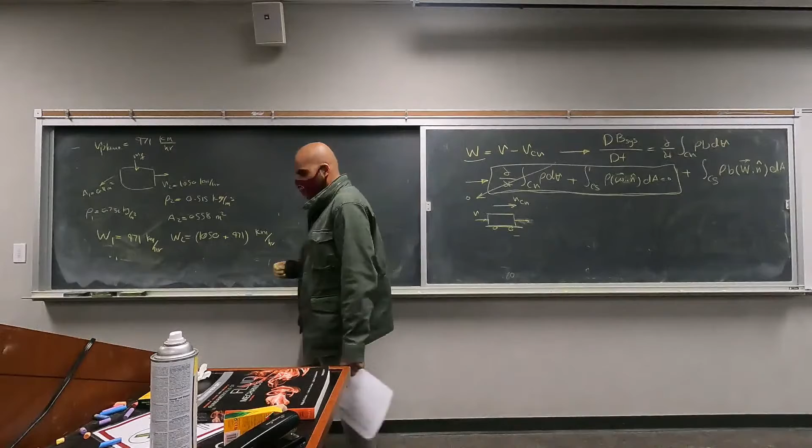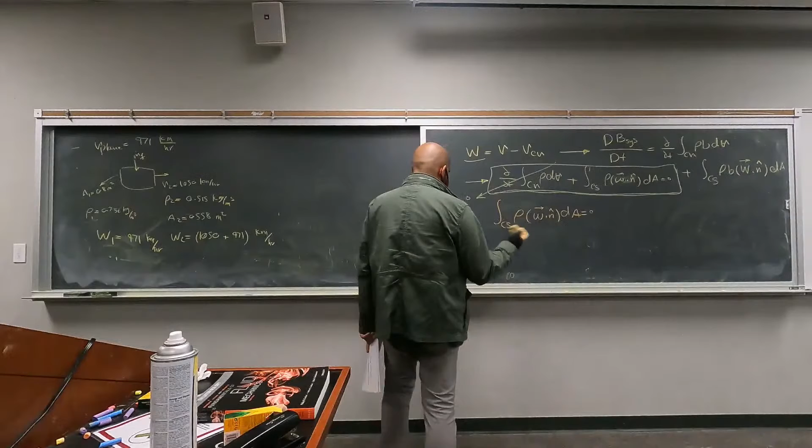And let's go to the main equation here. It is a steady state problem, so changes with respect to time are 0. And we are going to get the integral over the CS of rho W dot n dA equals 0. We are not given any information about whether the incoming or outgoing flow is distributed uniformly or not. So we are going to assume that the flow is distributed uniformly, which essentially means that m dot in equals m dot out. Plain and simple, right?

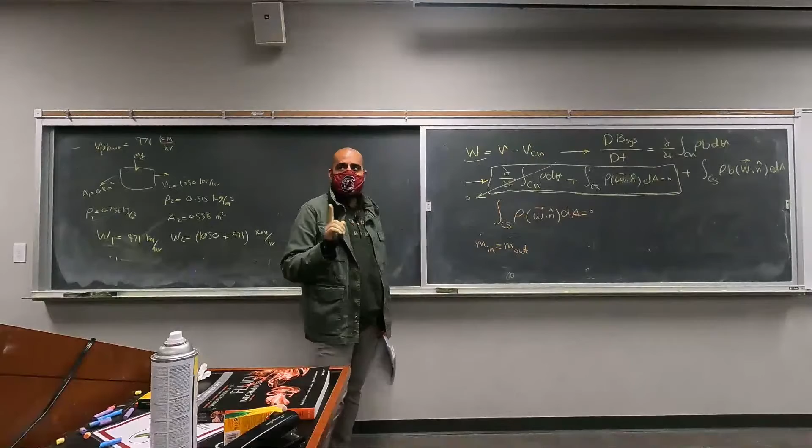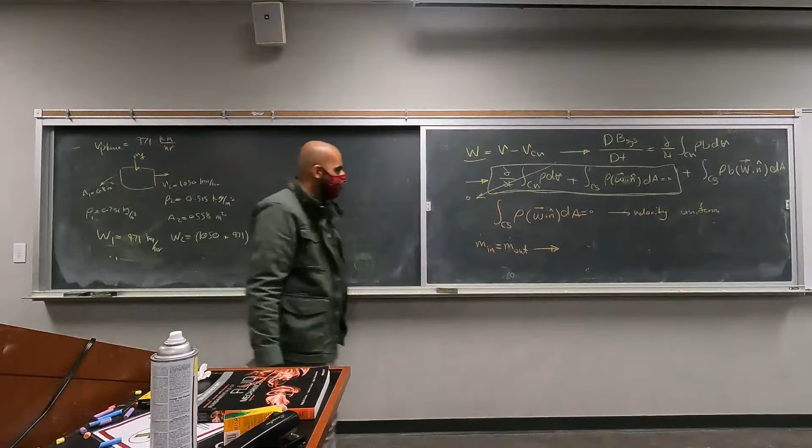We are making the assumption that the velocity is distributed uniformly everywhere, so all of the m dots are going to be equal to rho AV, or rho A V average. So we don't have to take any of the integrals. Velocity uniform means we can take the velocity and the density out, and the integral of dA is going to be A. And what are the m dot ins? m dot f plus m dot 1, and that has to be equal to m dot 2.

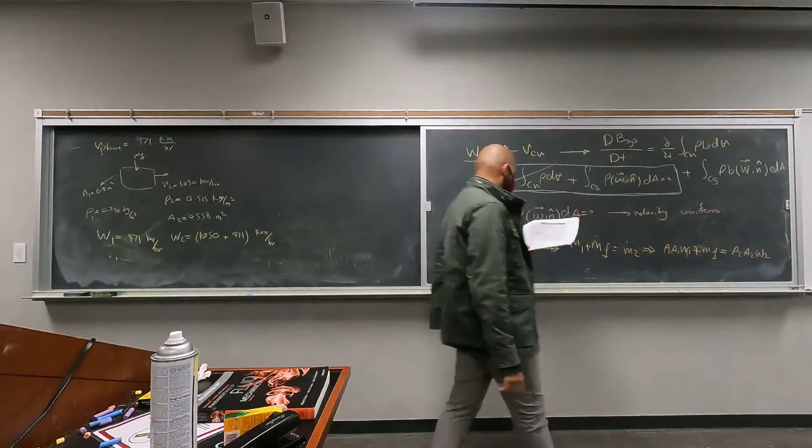What is m dot 1? It is rho 1 A1 W1, since in this case we have a moving frame, plus m dot f equals rho 2 A2 W2. Okay? And we have all of the parameters we need: rho 1, rho 2, A1, A2, W1 and W2. So we plug the numbers in, and you get m dot f to be 1,050 kilograms per hour.

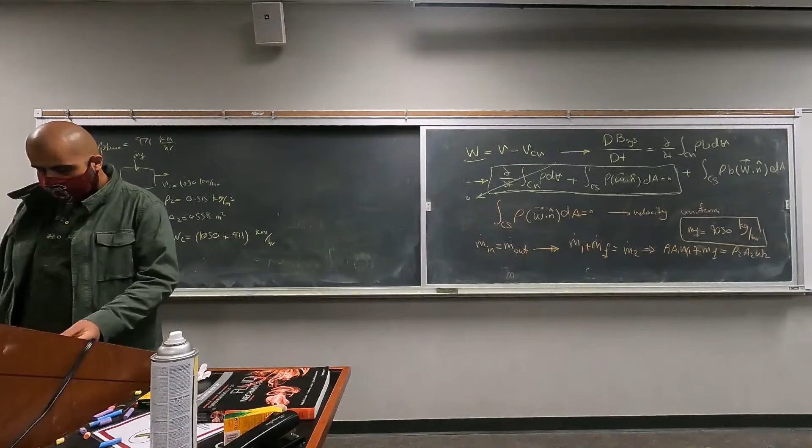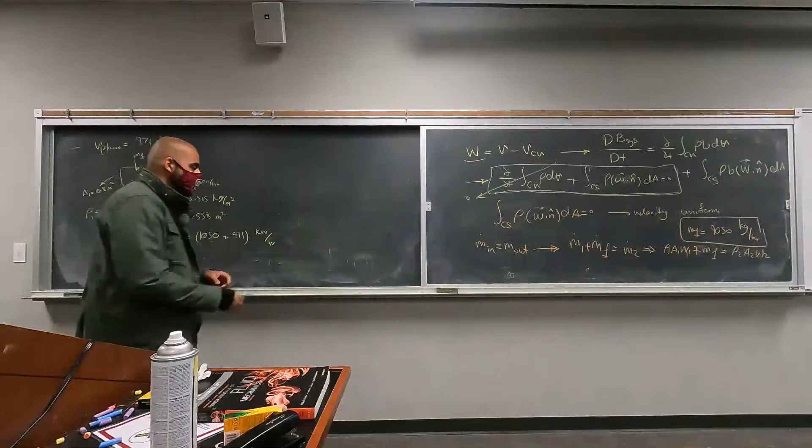Do we have any questions? Okay. I guess that's it for today's class. Right now, we are talking about moving and non-deforming control volumes, but in the next class we are going to talk about deforming control volumes and the momentum equation. And also, we will have a short discussion on the energy equation. We'll finish this chapter by Thursday and move on to chapter 7 on Tuesday.